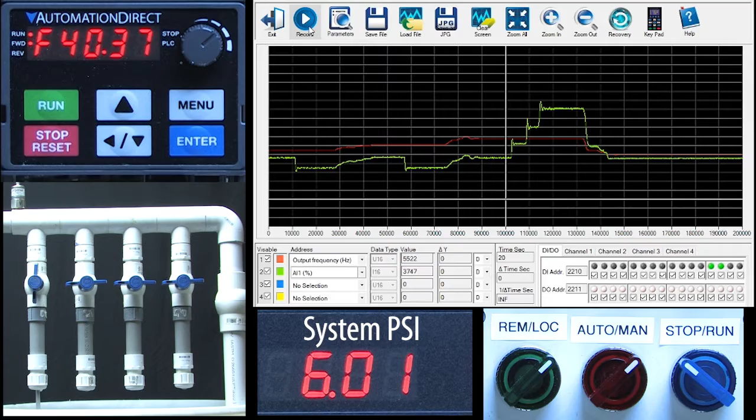In part 1, we saw that our system was capable of maintaining 6 psi regardless of how many valves we opened. All we had to do was keep adjusting the motor frequency to compensate for the pressure changes. In this video, we'll tell PID to do that for us. We put the PID setup in the remote configuration. So let's switch over to that mode.

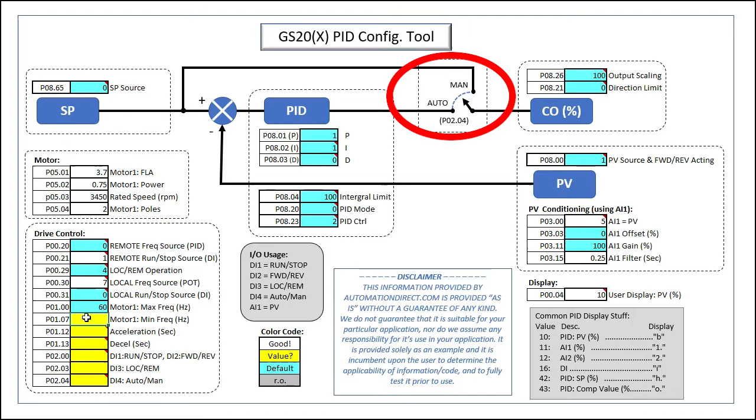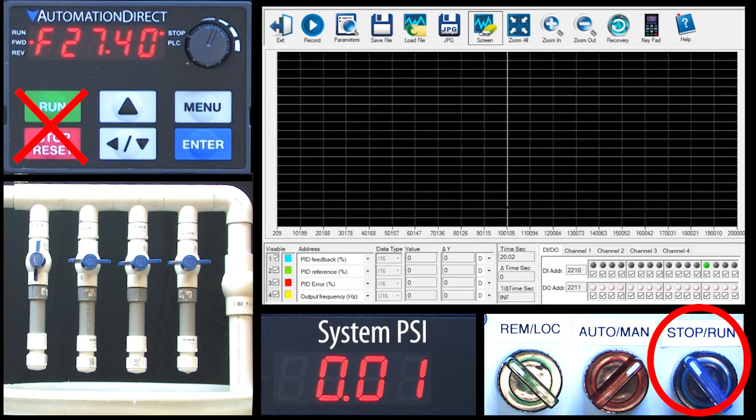Remember from our block diagram, when we're in PID mode, we can either manually control the drive's output, or we can have PID automatically control it for us. Let's start by manually controlling the motor's frequency. We set up remote mode's run stop to be controlled by a switch, not the keypad like we did in local mode. So I'll flip that switch to run.

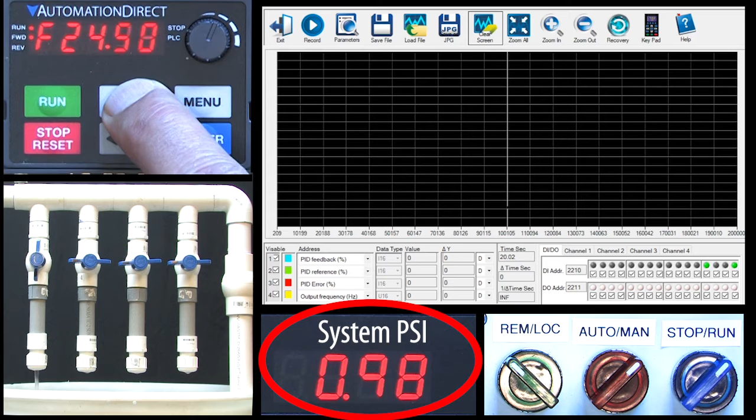We set up the frequency in remote mode to be controlled by the keypad, not the potentiometer. So let's adjust that to get our system to 6 psi. And just like we saw in local mode, it takes about 40 Hz to do that. So everything we did in the previous video in local mode, we could have done using this manual bypass in remote mode, right? Well, yeah, and that's exactly what manual mode is for, so you can disable PID and test your system.

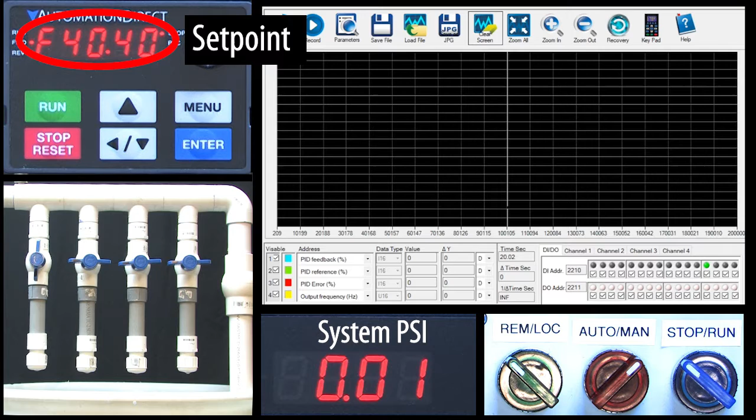Okay, but we want PID to automatically do that for us. But how do we tell PID we want to be at 6 psi? The GS20 understands frequency. It doesn't know anything about psi. Well, here's how that works. We told PID to use the frequency input as the set point. When we flip over to auto mode, PID no longer reads this as a frequency. It uses it as a percent scale.

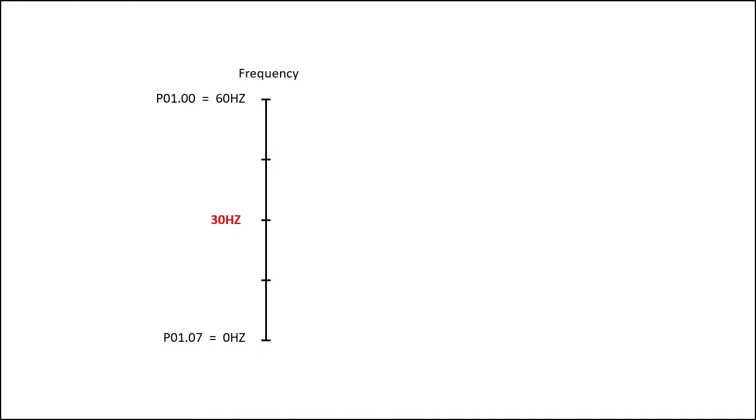That is, it knows the frequency range we entered is 0 to 60 Hz, so if we enter 30 Hz, it reads that as 50% of full scale. 50% of our 15 psi sensor range is 7.5 psi, so in effect, PID interprets that 30 Hz as 7.5 psi. We want 6 psi, which is 40% of our 15 psi range. 40% of the 60 Hz frequency range is 24 Hz, so that's what we enter on the frequency scale to represent our 6 psi set point.

The GS20 does it this way because it keeps everything ubiquitous. It doesn't matter if you're measuring temperature or psi or what the full range is. You do everything exactly the same way because it's all in percent. Now you can see why I put 0 Hz in for the min frequency. If we had entered something else here, then it would be 40% of this range.

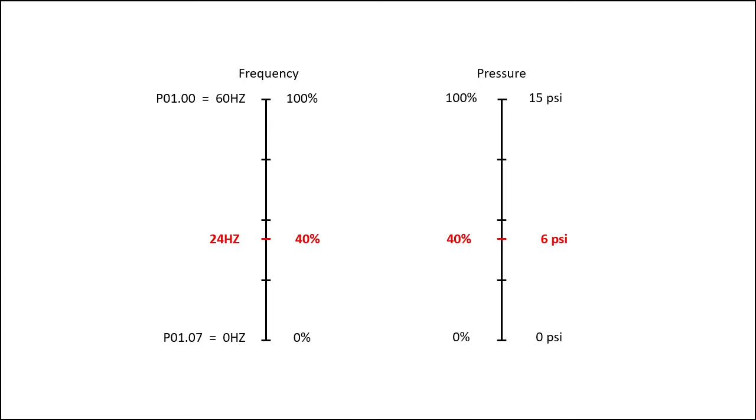Great. We're using the remote configuration, which is where we put PID. We want to automatically control the output frequency, and we specified a set point, which again is 40% of our frequency range, which tells PID to go to 40% of our sensor range, which for us would be 6 psi. I'll switch to auto, and sure enough, PID automatically changes the motor frequency to get us to roughly 6 psi.

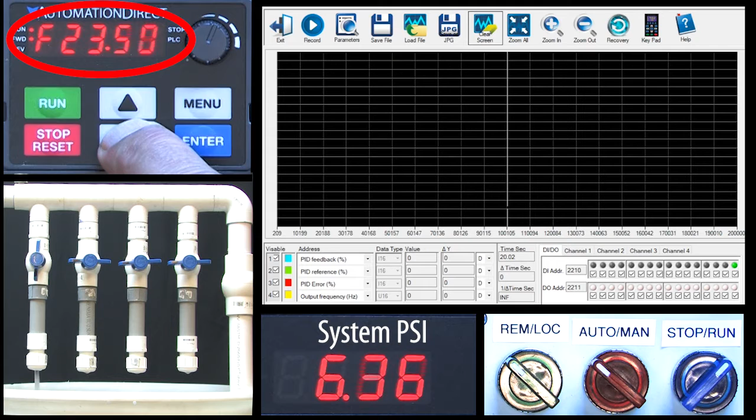Why aren't we exactly at 6 psi? Well, that's because our system isn't linear. The GS20 has a number of ways to correct for that, but for now, we'll just manually adjust our set point to whatever it needs to be to get the system pressure to 6 psi. It looks like it's around here.

I have this scope set up to show the process variable, our sensor value, in blue, the set point, where we want that process variable to be, in green, and the error signal in red. And we have the output frequency in yellow. Notice that everything's in percent except the actual output frequency, which is still in Hertz.

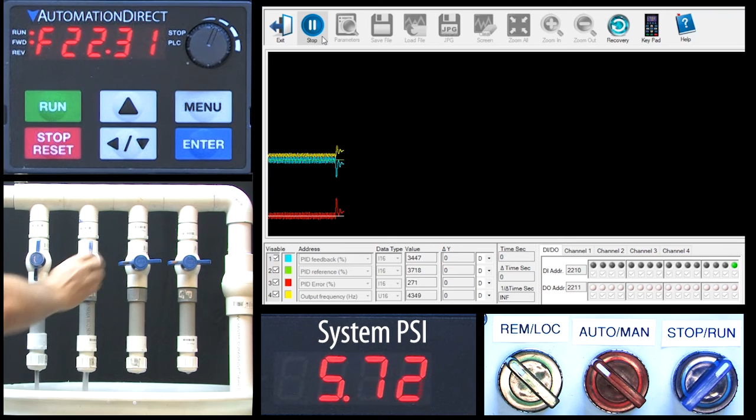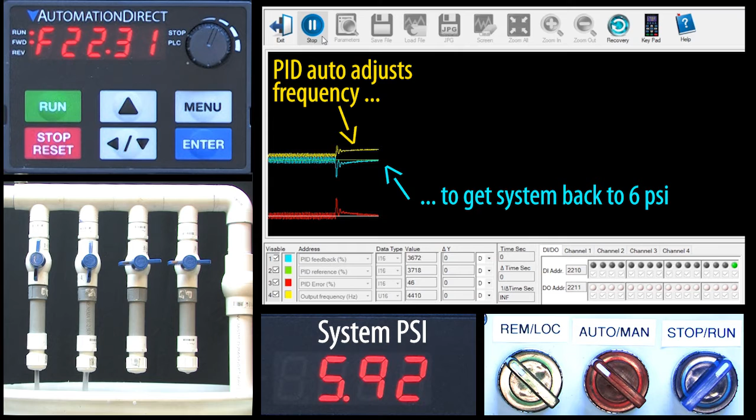I'll run the scope and open a valve, and look at that. The GS20 automatically adjusted the yellow drive frequency to get the blue system pressure back to the green 6 psi set point. I'll open another valve, and when the blue system pressure drops, PID sees that and automatically increases the motor frequency again to get that blue system pressure back to the green set point. Open the last valve, same thing. Perfect.

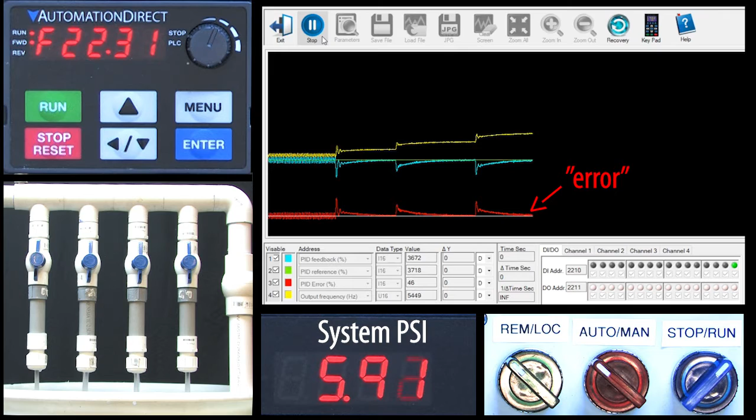We can see the difference between the green set point and the blue process variable, which we call the error signal, down here in red. PID is always trying to get that difference, or error, to 0. And it's doing a pretty good job.

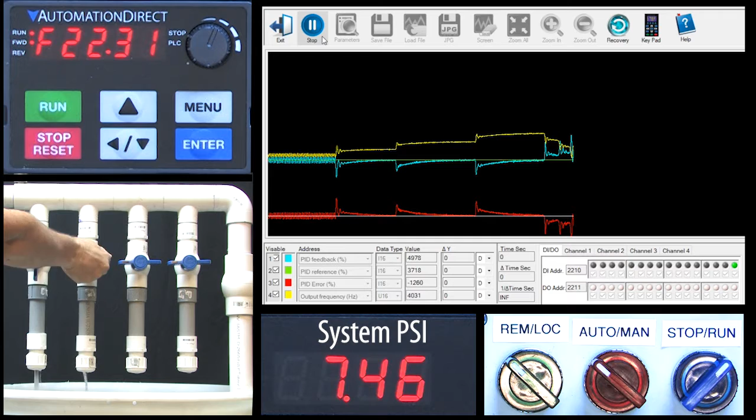What if I rapidly close 3 valves like we did in part 1? PID sees that and automatically lowers the frequency to get the system back to 6 psi. Exactly what we expect. Well, that's really cool, but it's taking around 5 seconds to do it. And while that's a lot faster and more accurate than when we did it manually ourselves in part 1, you have to wonder if PID can do better than that.

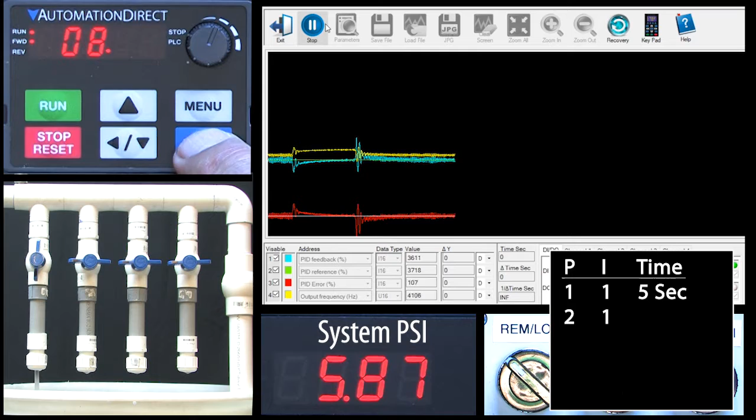I usually double P until things start to look unstable and then back off a notch. Let's try that. I'll start the scope, and I'll open a valve, and close it again just to get a baseline. Now let's go to parameter 8.01 and double P. Uh-oh, what's happening? Well, we've entered too much gain, and the noise in the system is causing things to oscillate. Let's change P back to 1.

That's better, but if I stop the scope and zoom in, we see the system really is still oscillating, which explains why this digital panel meter's display is jumping around so much. So let's cut P in half. That's looking better. The oscillations are about gone, and the digital panel meter reading is looking a lot more stable.

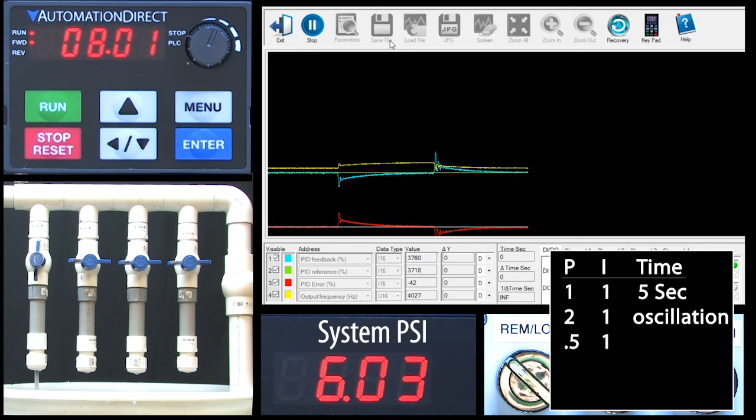But if I open and close a valve and stop the scope and measure that, the response time's gotten a lot longer because we reduced the gain. And remember, that also reduced the I term because we're using the dependent version of the PID algorithm, where cutting P in half also cuts I in half. So we need to double the integral term to get it back to where it was to compensate for cutting P in half.

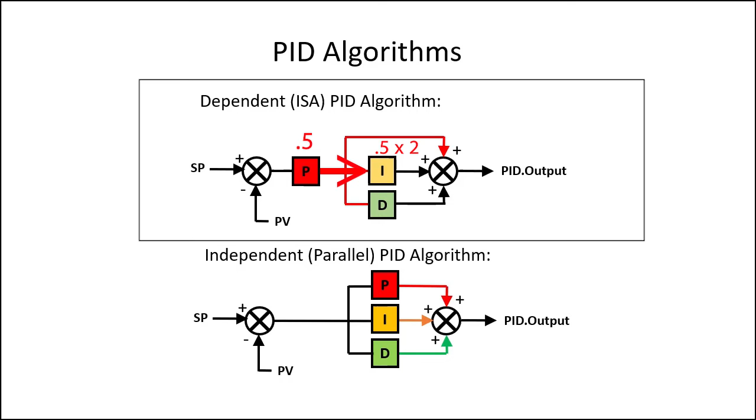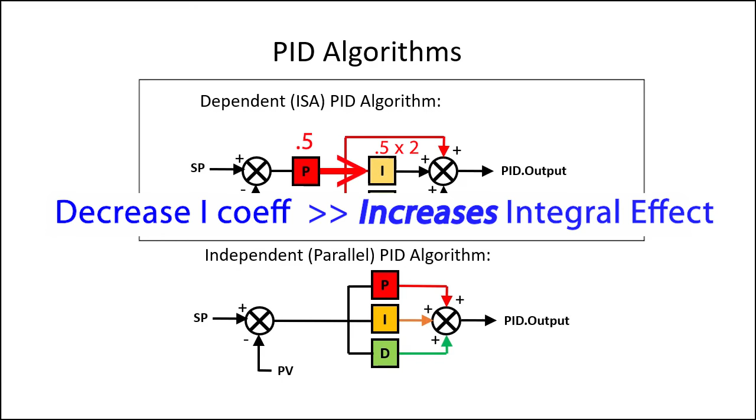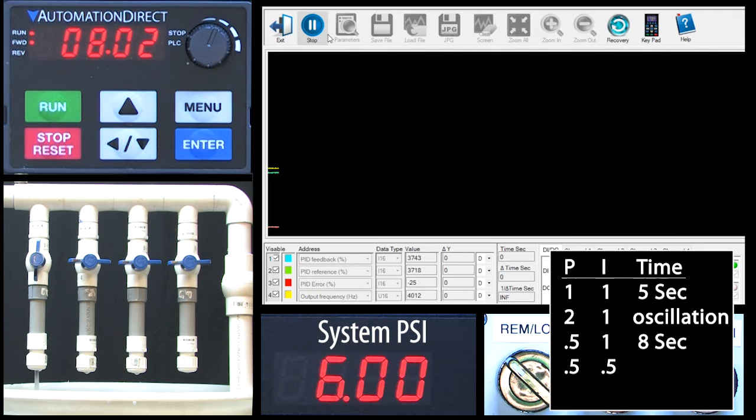Now this is key. Remember that in this implementation of PID, a smaller I term gives a larger response. So we really want to cut I in half to double the effect of the integral. So let's go to parameter 8.02 and reduce I to 0.5 to double the effect of the integral portion of the algorithm. Now if we start the scope and open and close a valve and stop the scope and measure that, it looks like we're recovering in just a couple seconds now.

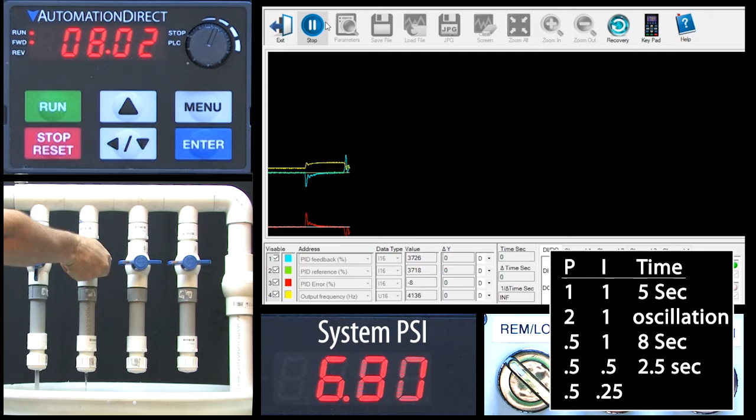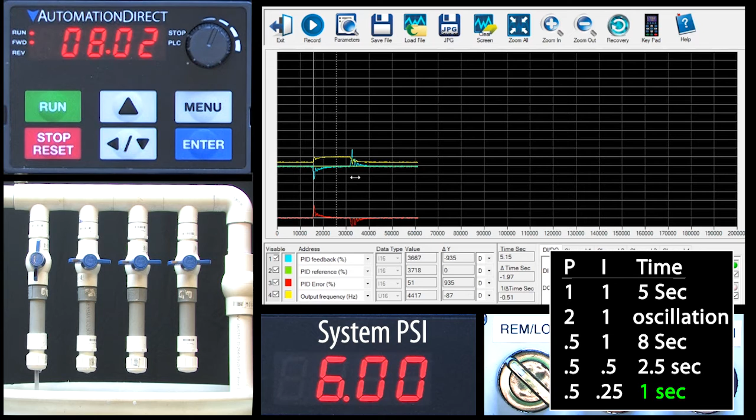So just for fun, let's double the integral again by cutting I in half again. I'll start the scope and open and close the valve. Holy cow. Looks like PID is recovering from the pressure drops in just a little over a second. That's great. The point here is, you can fiddle with this as much as you want to get whatever system performance you need. And this GSoft2 scope utility makes it super easy to visualize what's going on,